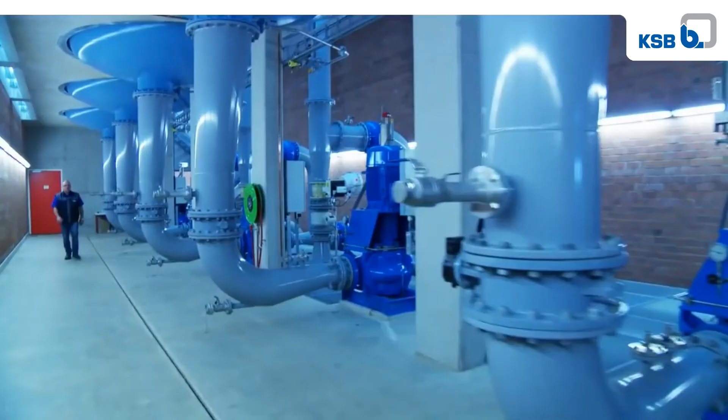The year was 1871. A German engineer, Mr. Johannes Klein, set ablaze a technology revolution with his invention of the boiler feed apparatus. Mr. Klein, along with Mr. Friedrich Schanzlin and Mr. Jakob Becker, kickstarted a success story we today know as KSB. The company has been improving fluid transport for over 150 years now.

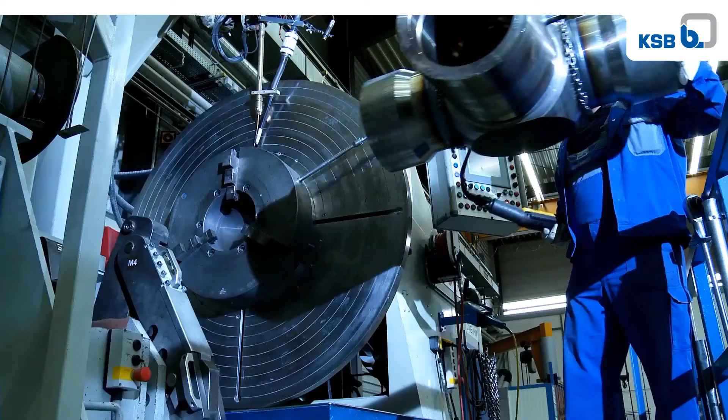Be it superheated steam or freezing cryogens, KSB is a pioneer trusted on all continents with its sales and marketing arms, manufacturing facilities and service operations. More than 16,000 employees generate consolidated annual sales revenue of more than 2 billion euros. The group has valve manufacturing locations in Frankenthal and Pegnitz in Germany, La Rochelle in France, Burgos in Spain, Echternach in Luxembourg, Dalian and Changzhou in China, Busan in South Korea, and Coimbatore and Kochi in India, thus living up to its core value of globalization.

The biggest control valve manufacturing facility of KSB is located near Kochi in Kerala, India. It all started in 1984 when a joint venture between Keltron and Best & Crompton was established under the name Masoneilan India Limited in Kerala to supply critical control valves for the process industries. After 10 years of the license agreement, the company was rechristened as MIL Controls Limited. In 1997, the company was acquired by the KSB Group. Today, the company is known as KSB MIL Controls Limited.

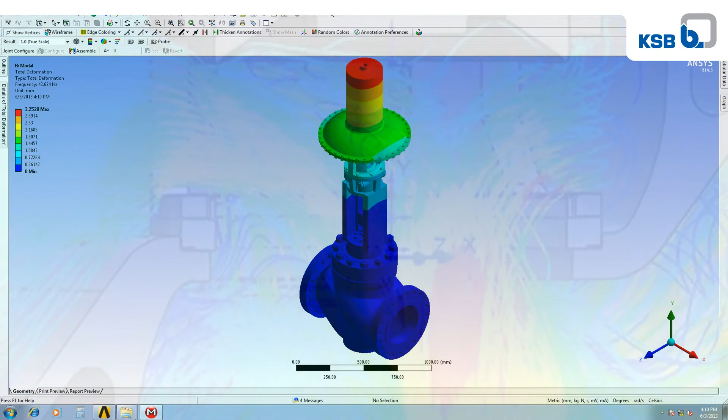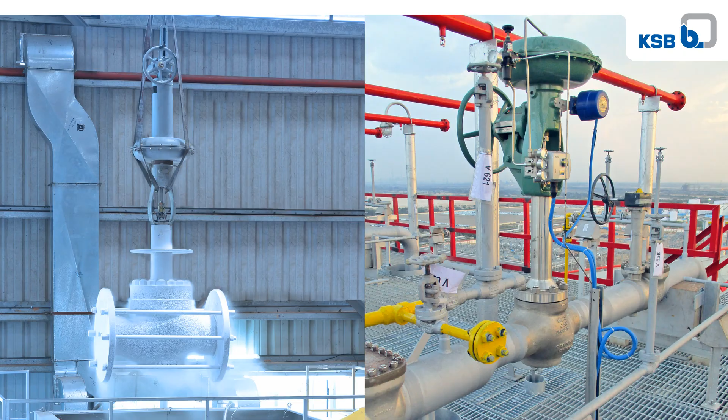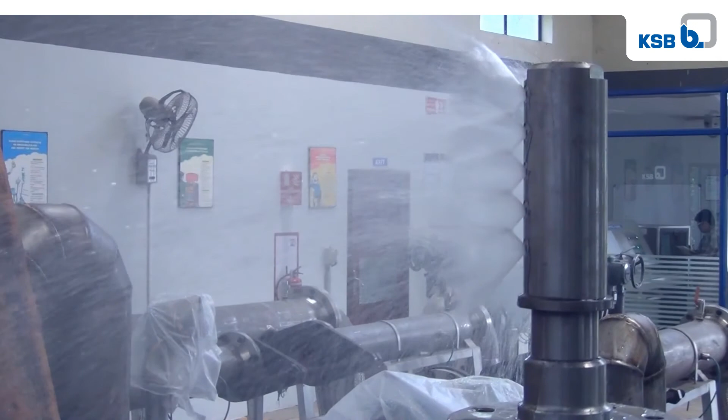KSB MIL scaled new heights with excellent in-house R&D capabilities, modern design tools like CFD, computational fluid dynamics, using which major designs are optimized and validated. The advanced test facilities, including a fully automated flow lab, have helped KSB MIL's engineers contribute amazing breakthroughs to customers in radical valve designs for a variety of liquids, gas, and steam operating at extreme conditions. Today, KSB MIL is one of the technology leaders in control valves, thanks to its state-of-the-art innovation center. This has truly enabled KSB MIL to meet the challenging needs of the process industry.

When customers describe their needs, we listen intently. Our engineers have an ingrained acumen, which helps us deliver more value with optimal efficiency. Their knowledge, skills, creativity, and dedication contribute in enhancing and delivering superior technological solutions in fluid handling and control.

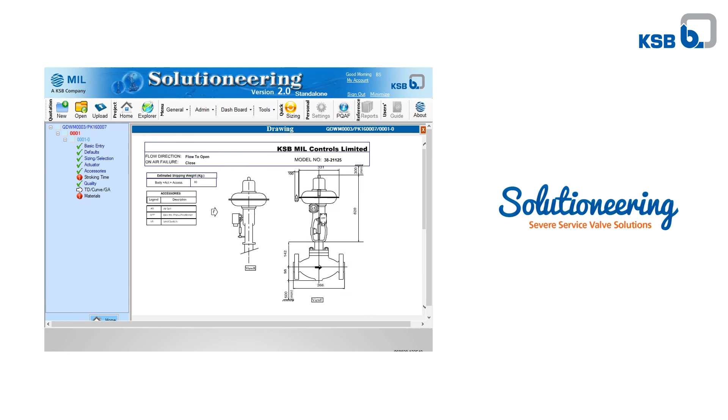And to assist them, at KSB MIL, we have a unique process that helps engineer solutions: a customized application engineering tool, called Solutioneering. One that helped pioneer the concept of advanced sizing solutions to Indian process industries, and introduced during the 1980s, for the first time, low-noise anti-cavitation trim designs in India. An example of this amazing solutioneering capability is the Matrix series, the multi-stage, multi-path axial flow control valves, designed to kill up to 500 bar of pressure in 40 stages.

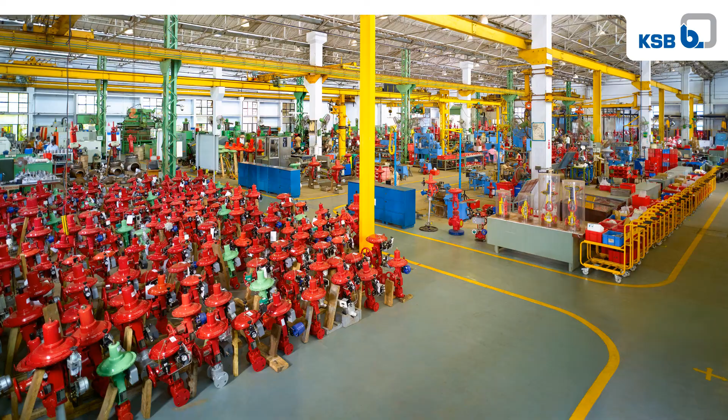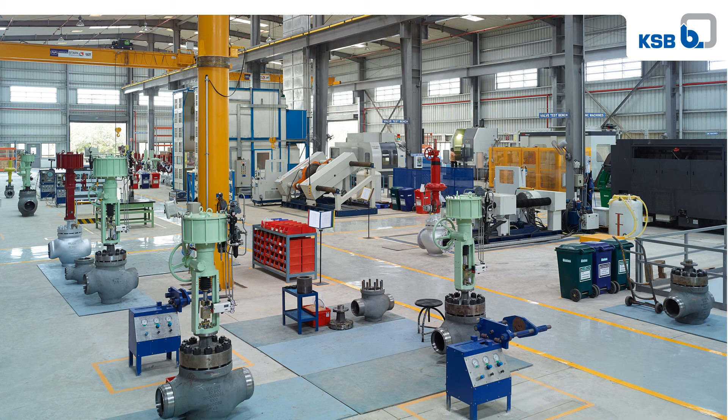KSB MIL has 2 well-equipped plants, with a total plant built-up area of approximately 10,000 square meters, for manufacturing control valves, tailored to suit customer requirements. The large valve plant, built with a handling capacity of 16 metric tons, caters to large control valves, typically used for supercritical thermal and nuclear power plants, refineries, and fertilizer units.

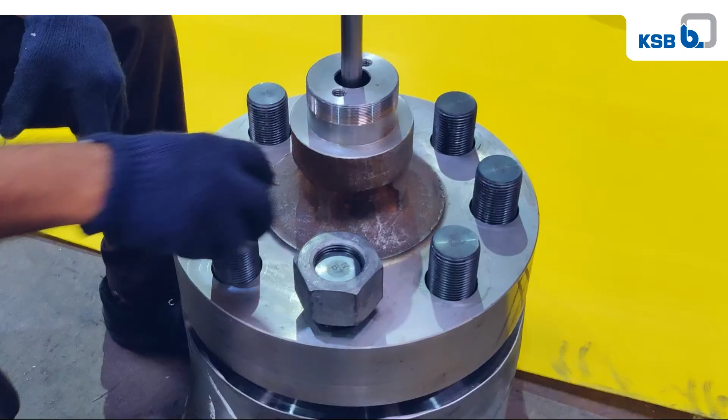KSB MIL employs the best machines and processes that guide each component through the manufacturing process, using advanced CNC techniques for producing the valve bodies and internals in accordance with international standards. The intricate valve parts, manufactured with precision, are assembled in the plant's highly methodical assembly shop.

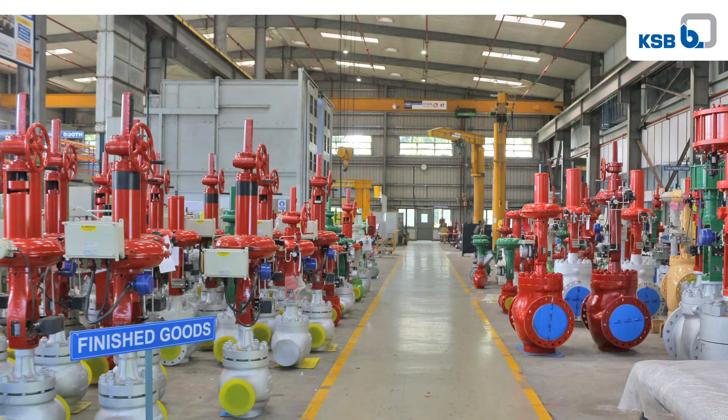Apart from high-pressure test benches for pressure and leakage testing, the testing facilities including helium leak measurement for fugitive emission monitoring, high-pressure gas test facility, cryogenic test rig, clean room etc., creates the product in alignment with the design. The quality control department takes care that only the very best valves leave the plant. Quality assurance and quality surveillance methods ensure compliance with the highest international standards.

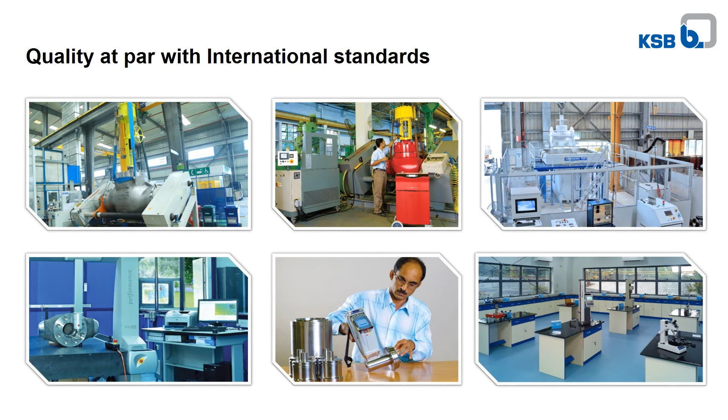Besides being an ISO 9001, 14001 and 45001 certified organization, KSB-MIL products are also CE and SIL qualified. KSB-MIL's high-performance control valves cater to normal and severe service applications in thermal and nuclear power stations, oil and gas fields, refineries, chemical and petrochemical plants, fertilizer units, and a wide spectrum of other industries.

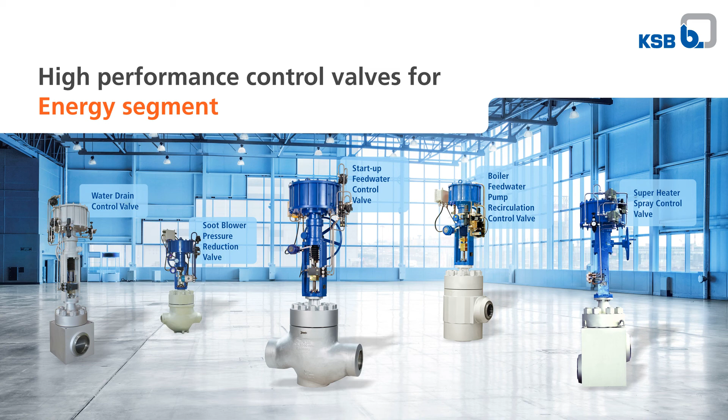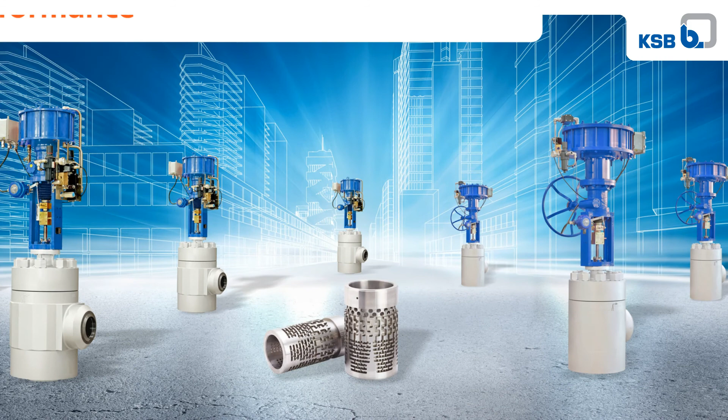KSB-MIL's 91000 Matrix Series multi-stage, multi-path, axial flow control valves for boiler feed pump recirculation service, or the multi-stage axial flow control valves in the MIL 78000 series, are examples of how world-renowned EPC contractors as well as thermal and nuclear energy producers trust KSB-MIL's control valves for the energy sector.

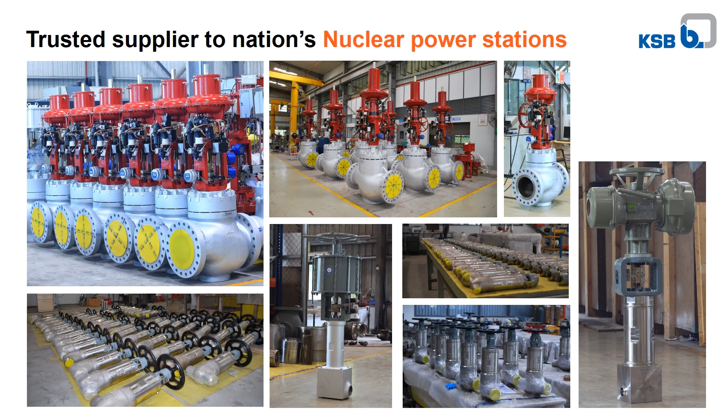Nuclear power demands the highest levels of safety. For the last two decades, KSB-MIL has been supplying control valves and bellow-sealed valves, required for both primary and secondary cycles of nuclear power plants.

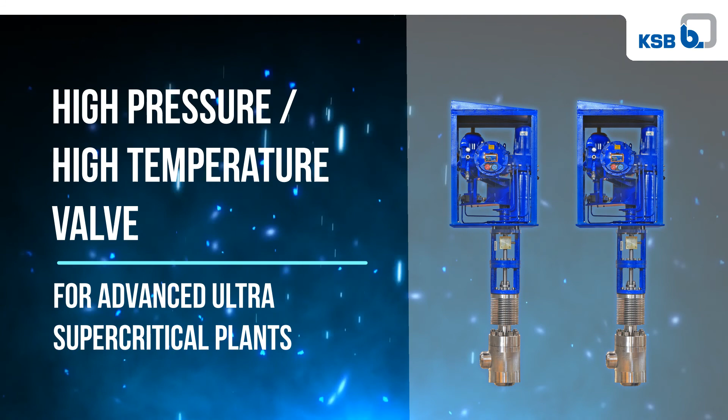KSB-MIL is proud to have contributed to the nation-building process by indigenously developing and manufacturing critical control valves for ongoing and futuristic projects in the country, including pilot projects for the upcoming advanced ultra-supercritical projects.

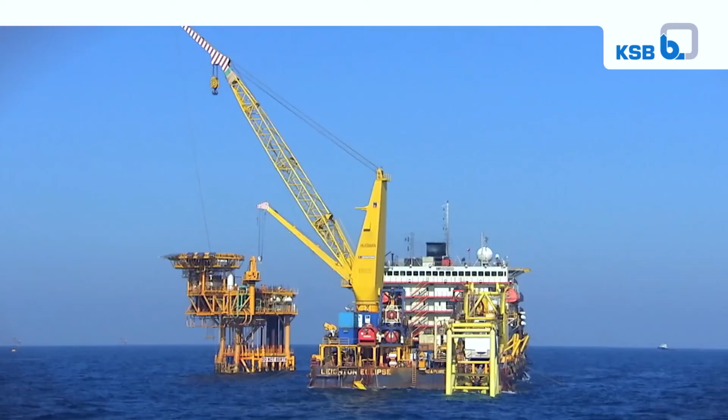With an experience spanning over three decades, and an installed base of over 100,000 control valves, KSB-MIL is a prominent player in the refinery sector across the globe. Approved by most oil and gas industry giants in the Middle East region and elsewhere, KSB-MIL control valves feature in most of the major projects like the Dangote Oil Refinery Project, KNPC Clean Fuel Project, etc.

Global EPC giants, oil, and fertilizer companies trust the performance of KSB-MIL's control valves, and we have certainly lived up to their expectations.

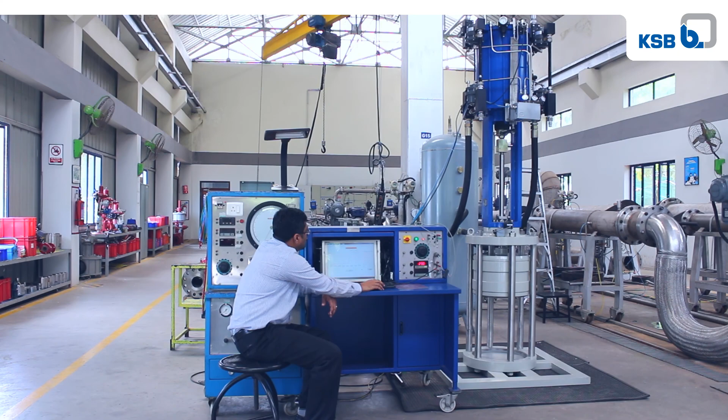With design marvels like KSB-MIL's special anti-surge pneumatic circuitry in the arsenal, we also help to protect critical rotating equipment like compressors.

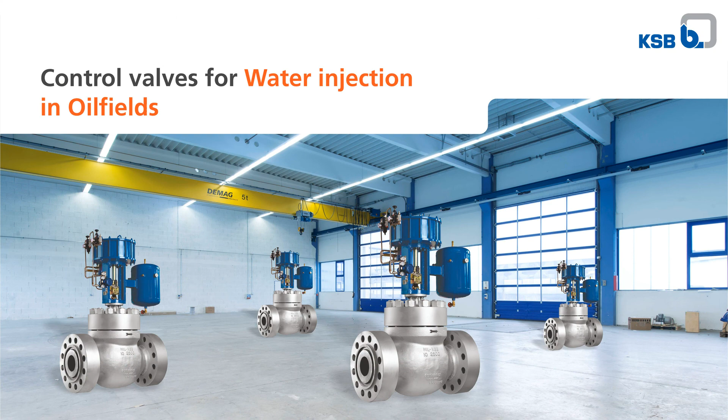When injecting water into oil fields, where clogging due to entrained particles like sand poses a new challenge, customers like Cairn Energy regularly use our technology to overcome challenges in this sector.

High-pressure ammonia and carbonate solution letdown are yet another application in the fertilizer segment for which designs like multiple-stage labyrinth control valves, especially under heavy flashing and low temperatures, are successfully used.

KSB-MIL's cryogenic control valves, designed to function in extremely low temperatures, feature in LNG and petrochemical units, or for the ground testing facilities in rocket propulsion centers of the Indian Space Research Organization.

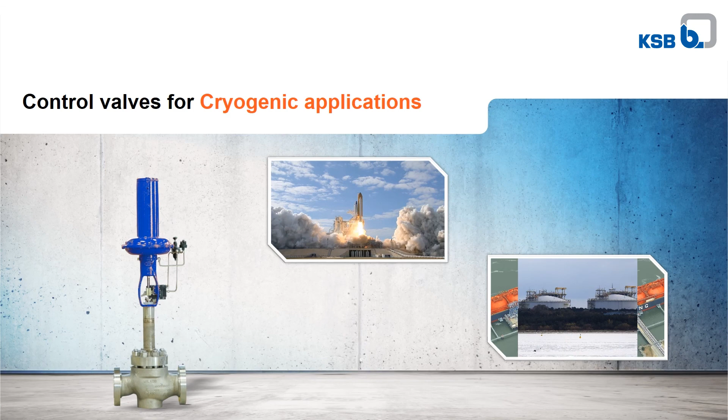KSB-MIL not only supplies control valves, but also ensures that they are maintained satisfactorily. Whether you are completing a scheduled turnaround, or are faced with an unexpected repair, you need to get things back up and running quickly and safely.

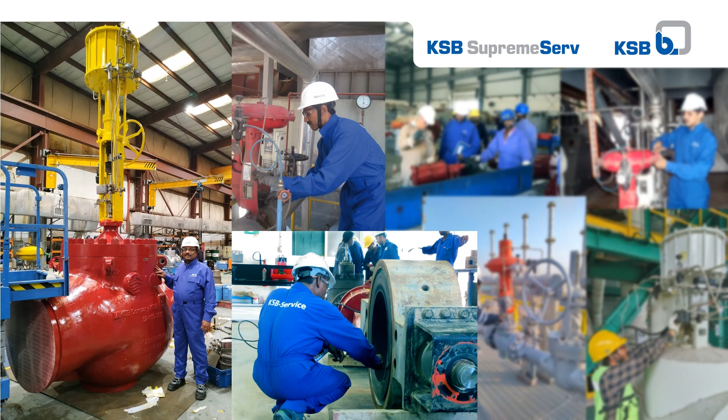With a wide network of sales and service offices, a robust aftermarket KSB SupremeServ team is always poised for action at our customers' call, offering services such as timely service assistance, recommending spare parts, on-site repair, commissioning assistance and necessary refurbishment of products. This is augmented by regular customer training programs on sizing, design, and selection for control valves.

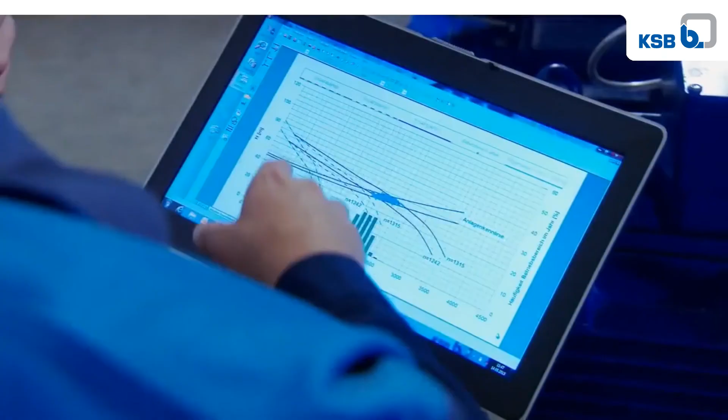KSB's goal is to develop innovative product solutions that are energy efficient. Demand for energy and the requirements of environmental protection is increasing. KSB-MIL also contributes to the environment by actively developing low-emission control valve gland seals and bellow seal valves.

We understand our responsibility to the environment and society. Initiatives like rainwater harvesting, low carbon footprint production processes, and conscious green initiatives are given due importance by the management while expanding the infrastructure.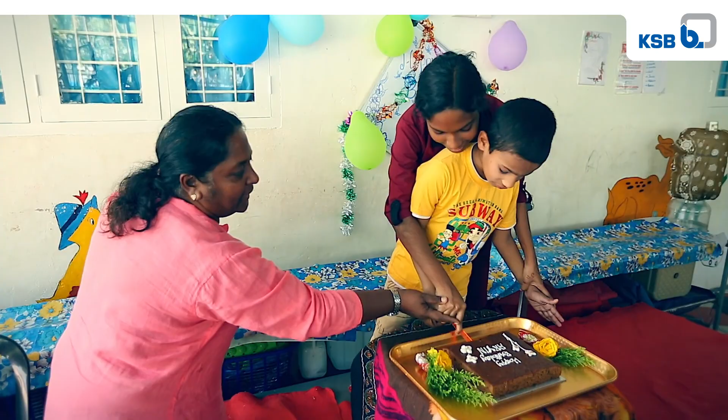Innovating with new possibilities, challenging the scenarios, frequent updating, and customizing ourselves towards increased efficiency to meet varied customer requirements is the key to our success. Constant innovation, reaching out to customers, through a global leader in pumps and valves like KSB, will make KSB-MIL among the world's most sought-after names in flow control.

KSB. Technology that makes its mark.